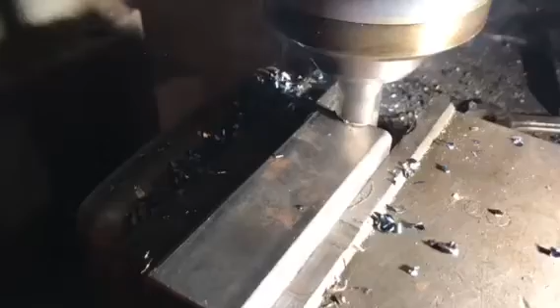We'll be discussing the stress-strain analysis. Stress is a quantity expressing internal forces that neighboring particles exert on each other, while strain is the measure of deformation of the material. The ratio of stress and strain provides the modulus of elasticity for the material, which provides insight into how much the material can take before permanent deformation.

The analysis of stress and strain in materials is imperative to all branches of engineering, from infrastructure such as dams, bridges, and tunnels, to aircraft parts and structural materials. The stress and strain analysis is an important part of the manufacturing process.

This is the stress and strain diagram. It shows how the material behaves in a certain way. In the elastic region, if pressure is applied before it reaches its proportional limit, the material will return to its original shape. Once the material reaches yielding stress, or past the proportional limit, the material will begin permanent deforming. This is commonly called plastic deformation.

At this point, the object will continue to elongate with a constant load. When the object reaches strain hardening, the object will get stronger through plastic deformation. Once the object reaches necking, its cross-sectional area will start decreasing, which is caused by a large amount of strain over a localized part of the material. After this point, the material will enter fracture stress, which will result in the object breaking.

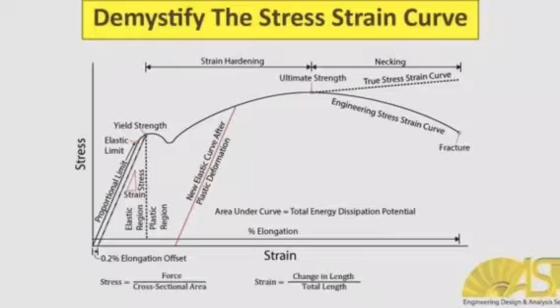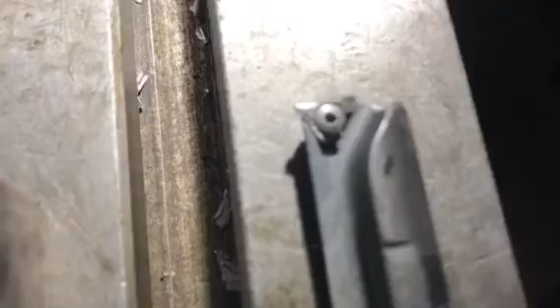Machine tools use very hard materials that have a very high yield point, which is why they're able to remove material without deforming themselves. Consequently, they are very brittle, and any interrupted cut can result in a broken insert. This goes to show that material selection and testing is very important.

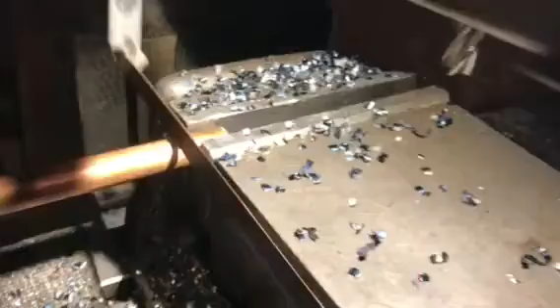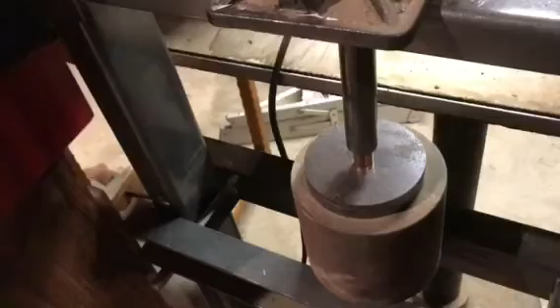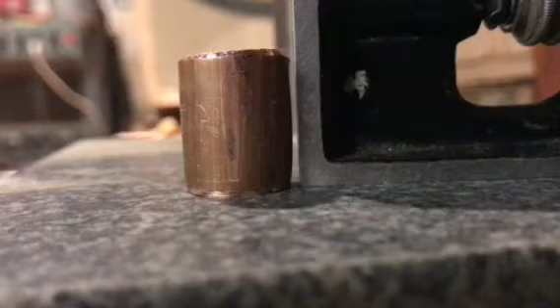At the hydraulic press, we can apply large amounts of normal force, but we won't need it because copper has a very low yield point compared to other materials. We can reach plastic deformation very fast. Here we can see the final diameter and length and the buckling of the part, just as it was in the SOLIDWORKS simulation.

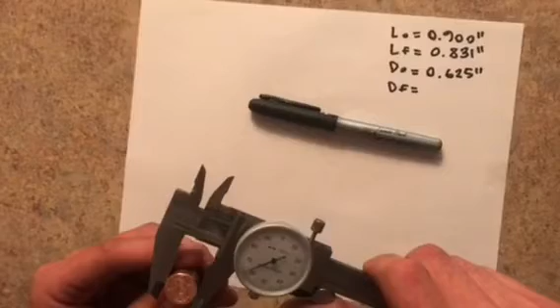All we have to do is take final measurements of the length and diameter. Here we have 0.831 inches for the final length. And the final diameter is 0.662 inches.

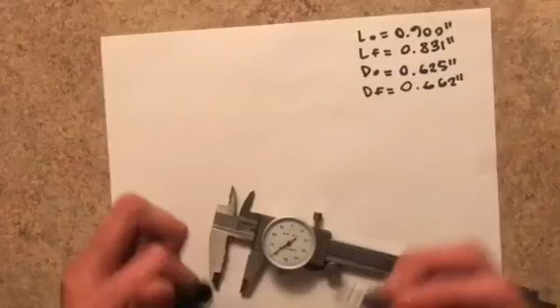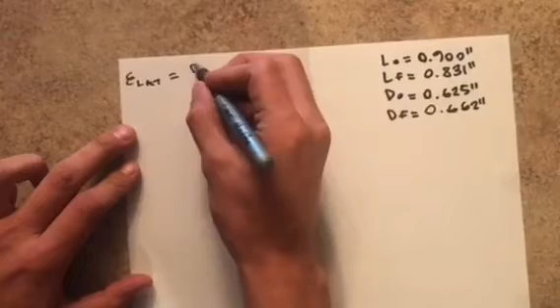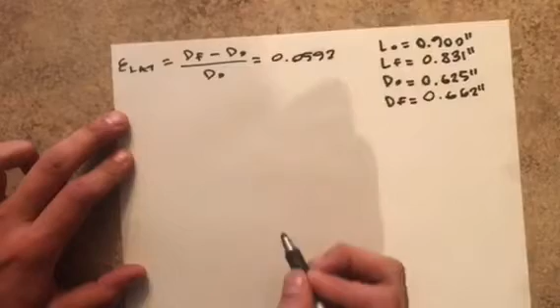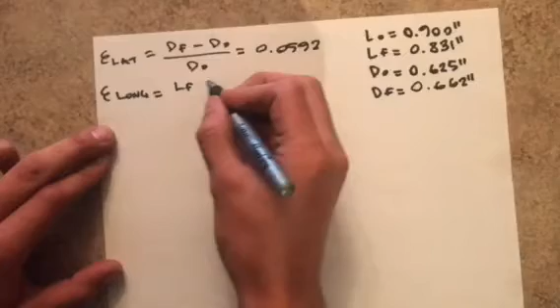Knowing these dimensions, we can calculate the latitudinal strain, and that's equal to the final diameter minus the initial diameter all over the initial diameter, and that's equal to 0.0592. We can also calculate the longitudinal strain, which is equal to the final length minus the initial length all over the initial length, and that's equal to negative 0.0767.

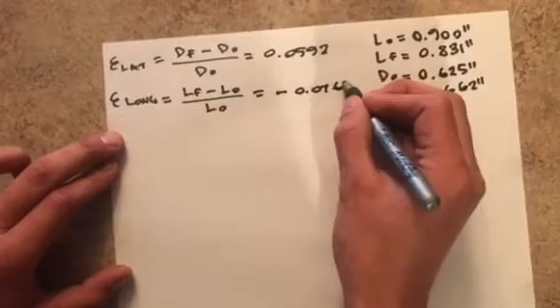We can also calculate Poisson's ratio, which is equal to negative the latitudinal strain divided by the longitudinal strain, and that's equal to 0.722. We can find the normal internal force by working backwards, finding stress first. We know stress is equal to the modulus of elasticity times the longitudinal strain.